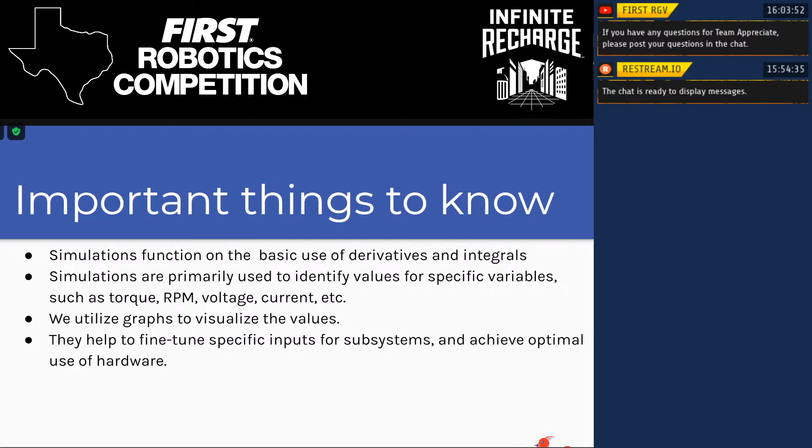Simulations themselves are primarily used to find variables that you're looking for. So torque, RPM, voltage, current, these are all things that simulations would be helpful finding, because they're things that would affect subsystems. Graphs are what we use to output these simulations and get what their outputs are, because otherwise we wouldn't be able to see what they're actually giving us, and they'd be essentially useless. And these graphs help us to fine-tune our specific inputs so we can hone in on the correct set of variables so we can get the outputs that we want.

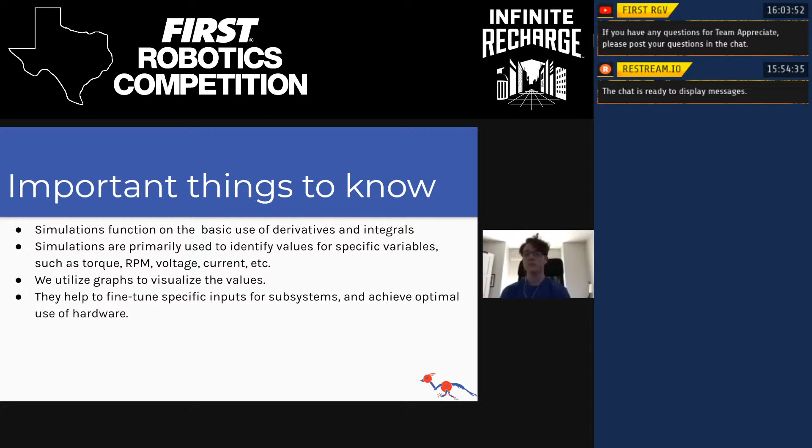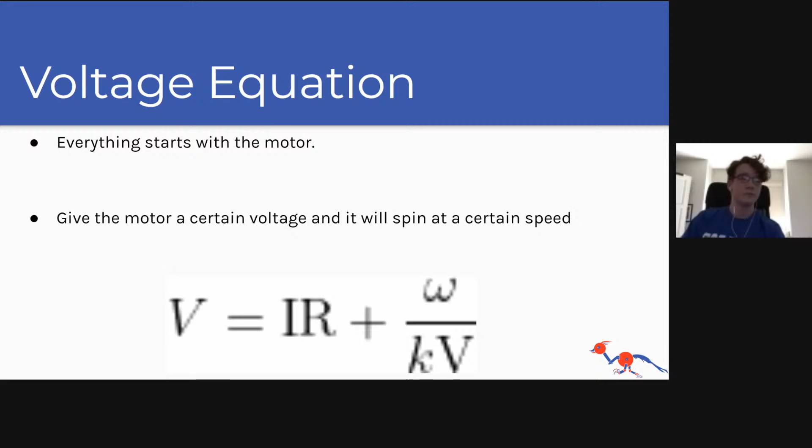So in terms of applying this to a robot, obviously robots can be broken up into different subsystems, and depending on what robot you're building and what game you're building for, subsystems will be different. For Infinite Recharge, we had a shooter, intake, drive base, and a hang. And we decided that the shooter would probably be the easiest thing to build a simulation for. But if you're going to build a simulation for a different subsystem, you're going to want to figure out the control mode for each motor in the subsystem.

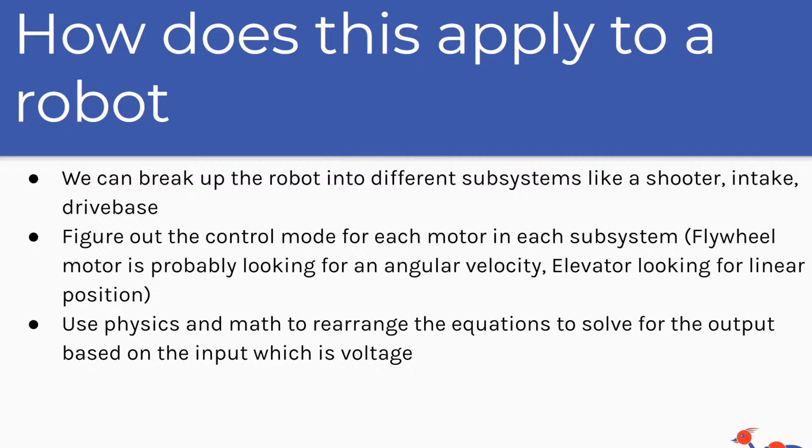So the flywheel motor for the shooter is looking for an angular velocity, as we want to know how fast it's rotating. And then an elevator per se would be looking for a linear position because we want to know how quickly it's rising and falling. And it's important to have an understanding of physics and math so you can easily change between these two types of control modes, and you can understand what type of equations would go to which type.

So going more into the derivation side of things, like I mentioned before, that voltage equation is going to be the initial starting point. It's where we get all the equations that we use in simulations. And you can't just use the voltage equation itself. You actually have to derive it and get different equations with different variables in order to find a more apt and succinct way to find the variables you're looking for.

So it can be a little bit difficult to find the derivation that you're looking for. So what we end up doing is finding the equation that we want, maybe online or something, and then plugging variables in to get it more exactly to what we want.

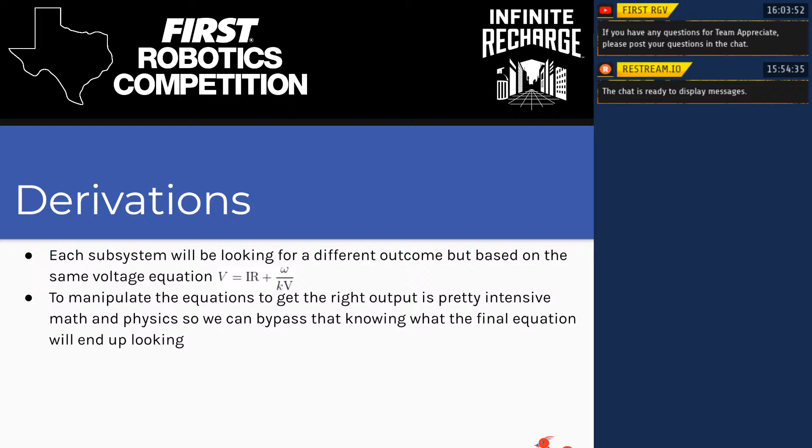Getting into the implementation in LabVIEW, we have our take on the subsystem and how it's implemented in a simulation. So we decided, like I said before, to take a relatively easy subsystem, like a shooter with a flywheel. And this is because it's a simple subsystem, because it only has two motors, both are spinning a flywheel, and it's a very simple way to calculate angular velocity, torque, current. It's definitely not too difficult in that regard.

And simulations are important. I actually wanted to just point this out because our flywheel during season last year, we actually couldn't quite hone in on the values that we wanted for it. We ended up manufacturing 3 separate flywheels, each with different radiuses and weight and widths, just because we didn't know what we needed. And so at the end of season, we decided to try to implement the simulation because we realized that it'd be much more effective and easier to use rather than just manufacturing more and more things and wasting more and more parts and time.

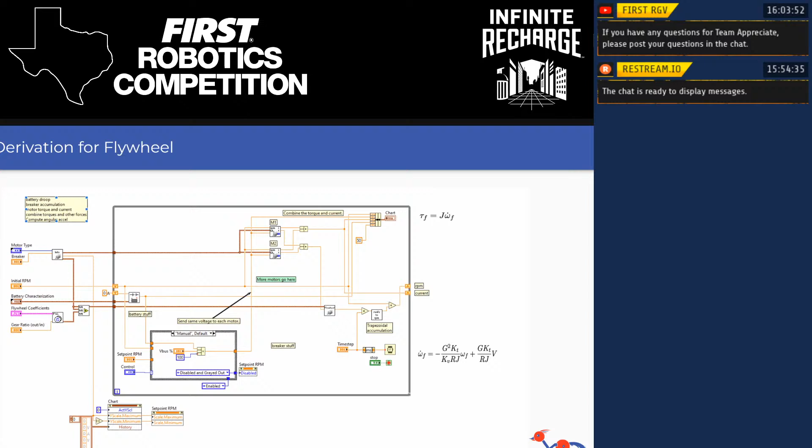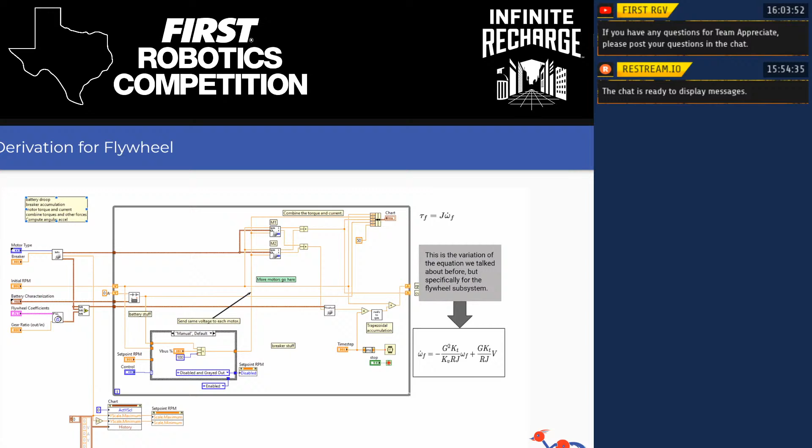So getting into the actual equation that we're going to be using for this flywheel, we have in the bottom right there, click, there's that equation. And that's the derivation of the initial voltage formula that we were talking about before. And so there we're looking for final angular acceleration using a bunch of different constants and variables like gear ratio and moment of inertia. It's not entirely important to understand exactly what that equation is and how it works. It's just important to know that that's the equation we're using.

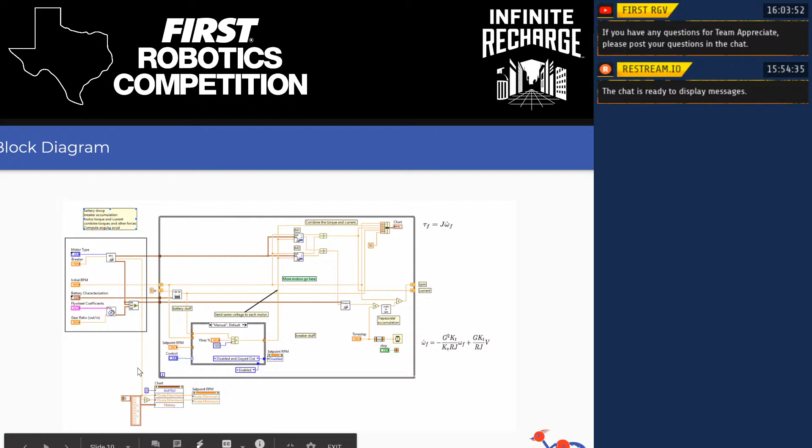So on the far left there, you'll actually see a group of inputs. And these inputs are basically everything that you're going to need for the subsystem. The user inputs them, obviously, and it contains things like motor type, breaker amperage, the initial RPM of the motor, battery characterization, flywheel coefficients, gear ratio, etc. And then those values are going to be plugged in to a lot of different areas in the simulation, which causes them to be very important. And knowing how to use them is also an incredibly important thing to do.

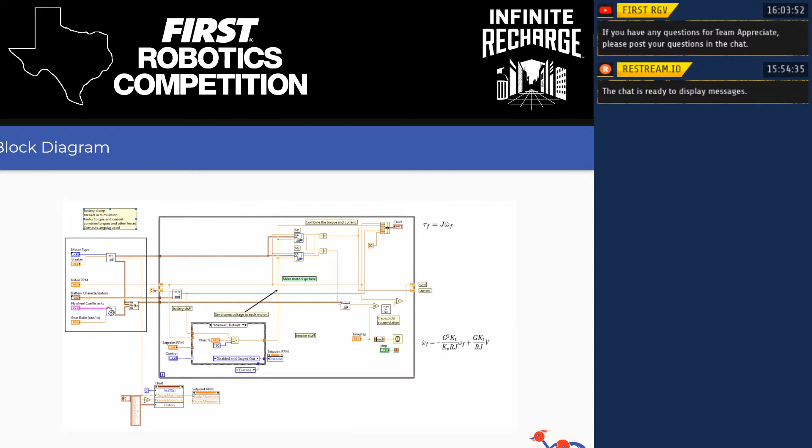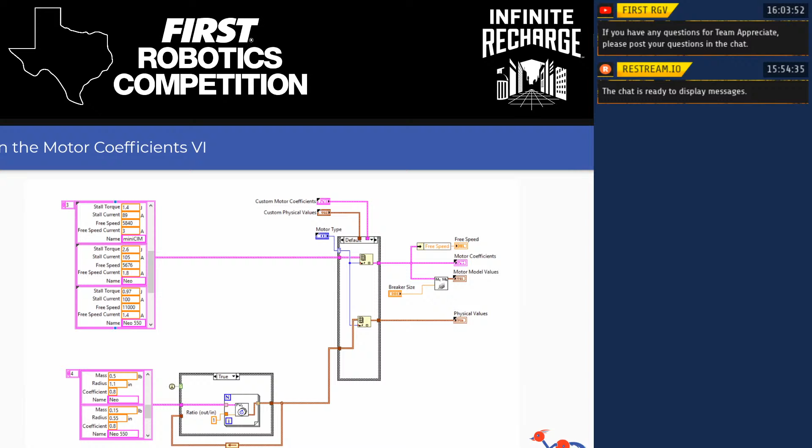So if we head into one of the input VIs, we'll see that you have a cluster, or 2 clusters, on the far left. And both of those serve to give you information regarding the motor. Now, the motor you can change as one of the inputs, and you plug it in to this sub VI, and that gives you the different motor values.

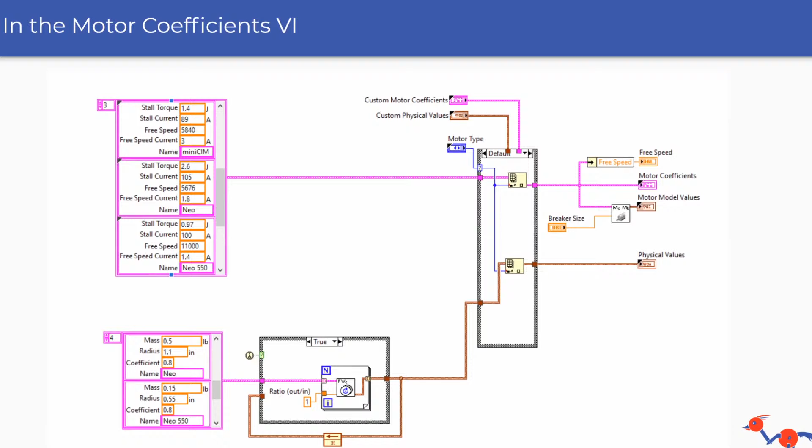So you get things like stall torque, stall current, free speed current, and you get the mass, radius, and coefficient of the motor. And these things are very helpful for finding things like the physical values of the motor, the free speed, the motor coefficients, and the motor model values, which we'll see as output on the far right. I think you'll have to click a bunch here because there's a couple of animations that we skipped.

So if you click again, you'll see that we're looking at the M1 and M2 blocks. And these VIs are helpful to combine torque and current, because as the values that are being inputted aren't graphable, we need to change them into something that is graphable. And so that's what those VIs are doing. And if we actually head into those, we'll see some of the math that's involved in that.

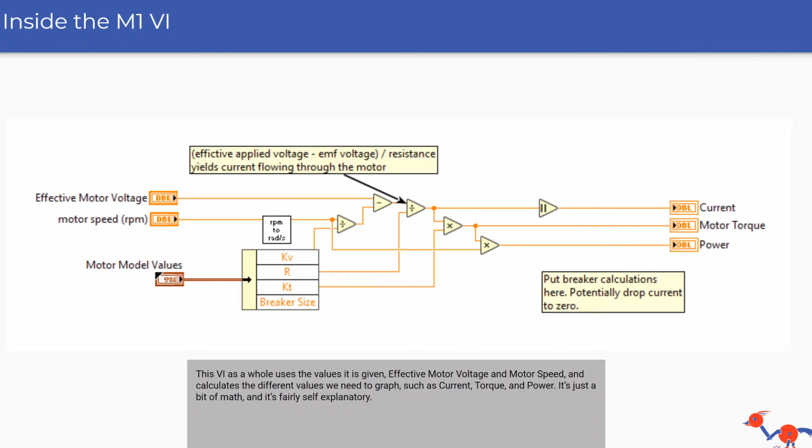So it's not actually too much complicated math. It's mostly just some basic division, subtraction, multiplication, etc. And you use that to find the current, motor torque, and power of the motor. So you're able to send that to a graph and see how it changes in regards to the different inputs you're going to give it.

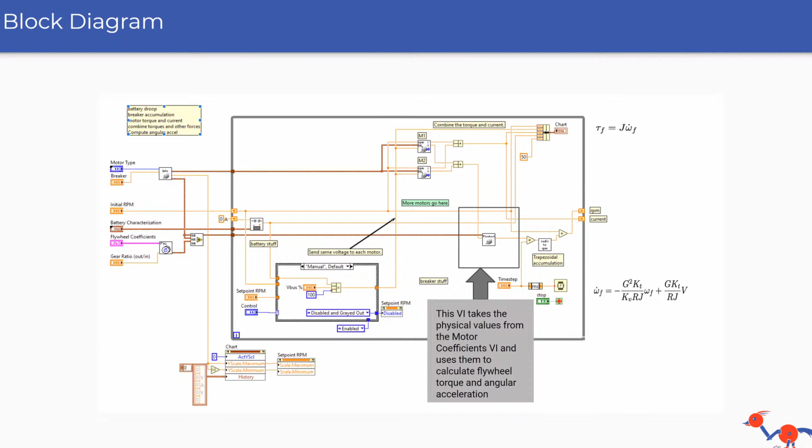So if we look towards more of the center, we'll actually see a VI that's called the torque and acceleration VI. And this VI is used to calculate the angular acceleration and the flywheel torque given the motor values that we set as input. And so if we head into that VI too,

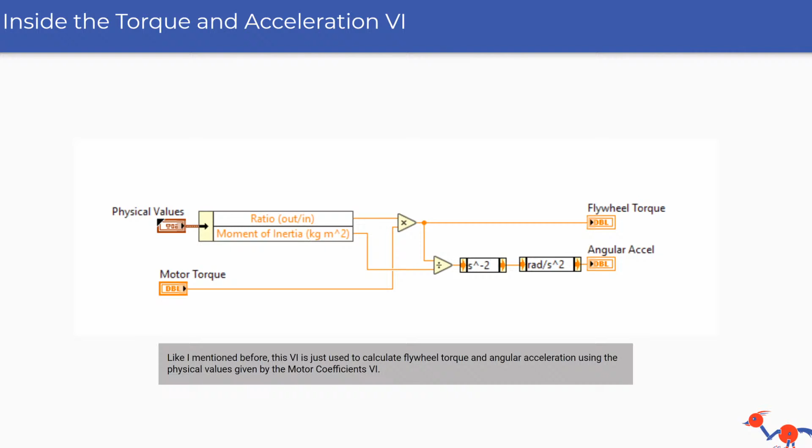we'll actually see just a lot of simple math again. We take the gear ratio and we multiply it by the motor torque and then divide that by J, the moment of inertia, and we end up with angular acceleration and the flywheel torque, which are two very important values that we need a lot in the equation that I showed you guys before.

So as a whole overview, you'll see there's a lot of VIs that I didn't really explain in much depth. Many of them are self-explanatory or not very useful in terms of actually implementing a simulation. Some of them are just testing or fail safes. So a lot of the things I did want to go over are the more important and definitely the more valuable topics to understand and learn about when talking about simulations.

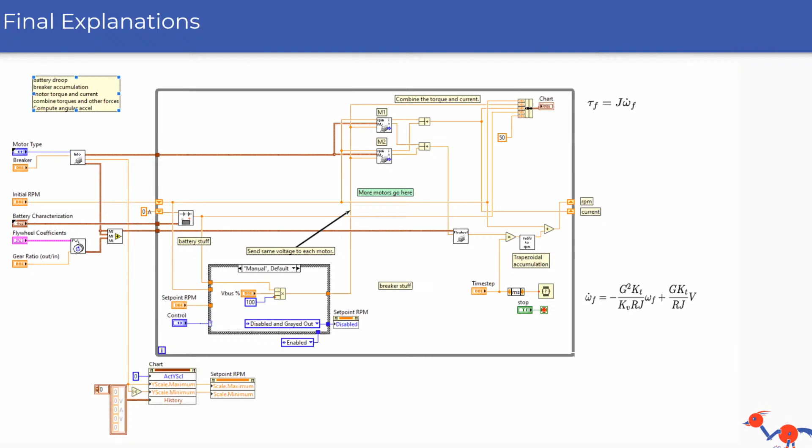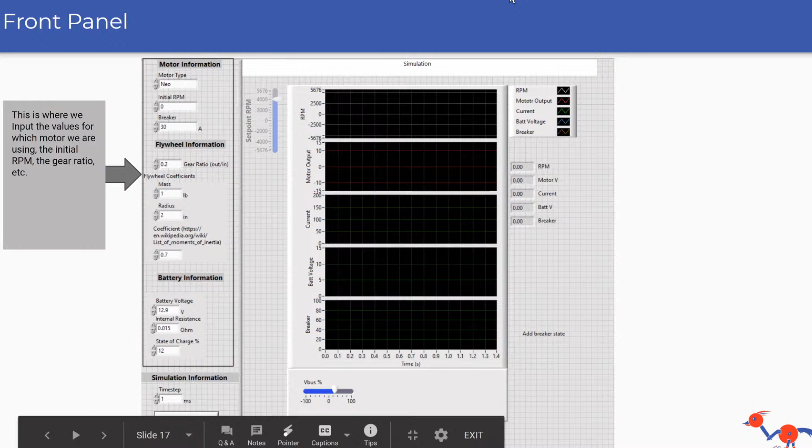So if we look at the far left, we'll see a bunch of the different inputs. And these inputs obviously correspond to the inputs that are shown in the block diagram in the coding part. And these inputs are very important because they change a lot of the different values we're going to get based on the gear ratio, the moment of inertia, the initial RPM, the breaker amperage, all that stuff. It's very important because it's going to change a lot of the values we get, and it's going to affect how we read our data.

And in the middle, we'll see the graphs that I was talking about earlier. And these graphs are obviously important because they serve as the output and basically the only method we have of understanding the numbers we input and how they affect the numbers we get out. And at the bottom, there's a little slider. It's the VBus slider. And if you don't know what percent VBus is, it's essentially just the power percentage that the motor is given. So 100 is fully forward, negative 100 fully backwards.

And sliding that up and down while the motor is moving actually shows you how much of a current load that gives the motor and how much of a current load that it takes on the battery. And that can cause a lot of brownouts or issues, and understanding that and being able to check for that is a very important thing. And that's also quite helpful for simulations.

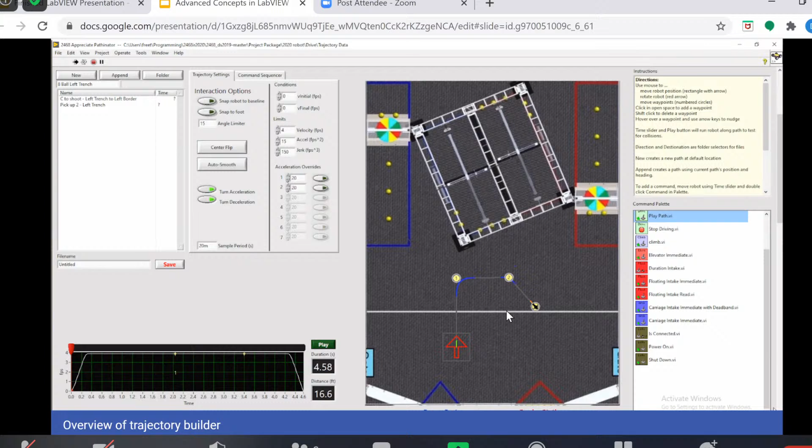First, I'll mention what a path planner does. So it basically gets a bot from point A to point B with any number of intermediate points. And ideally, you want to have an optimal path. Now, what this means is it's two main factors: the speed, how long your bot takes to travel the path, and then when it comes to wheeled robots, there's smoothness. It's important because you don't want to damage mechanisms by being too jerky or tipping the bot.

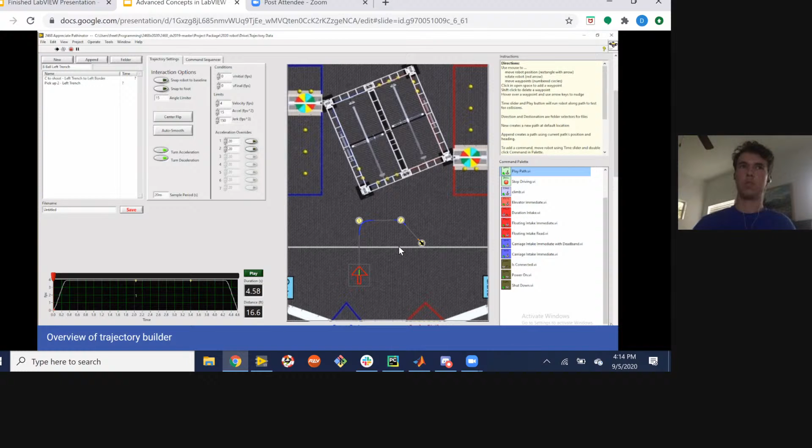And this slide right here is the main UI of our path planner. So in this whole gray area, the field image, you can select points and that'll make the path. This field is just taken from the game manual. We just put the image in here, and we have a configuration file that maps the pixels to real world values.

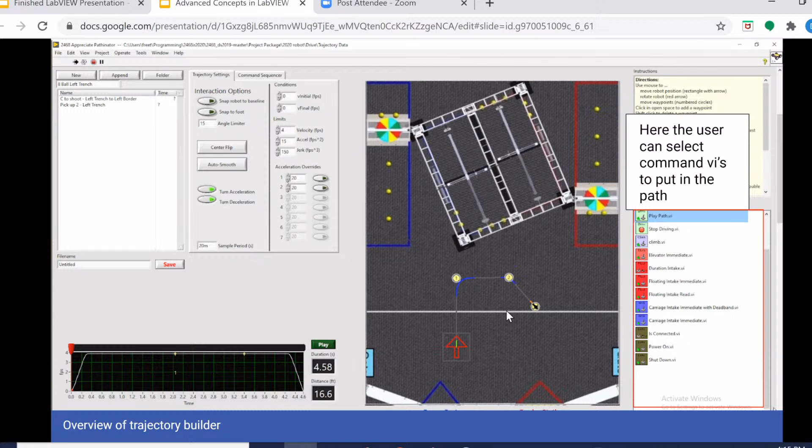On the right, we have this palette for commands because our paths have commands stored within them. And then when we run the path, the commands will automatically get called. So you don't have to run a part of a path, stop, call a command and then run another path. So it just makes the code a lot cleaner.

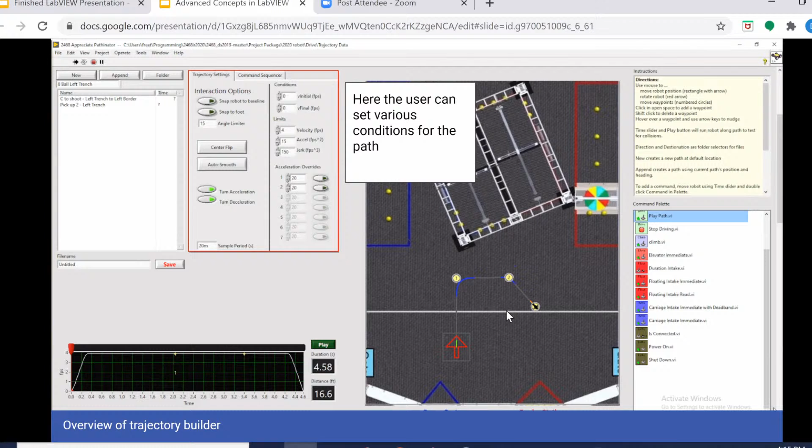Here, the user can set various conditions for the path, such as initial velocity, final velocity, and then limits on velocity, acceleration, and jerk, and then other things like acceleration override. And to the left of that is just the list of all the path files.

Down at the bottom, we have a velocity curve along with the duration of the path and the distance it travels. And if you hit the green play button, it'll show the red arrow on the field move along the velocity curve.

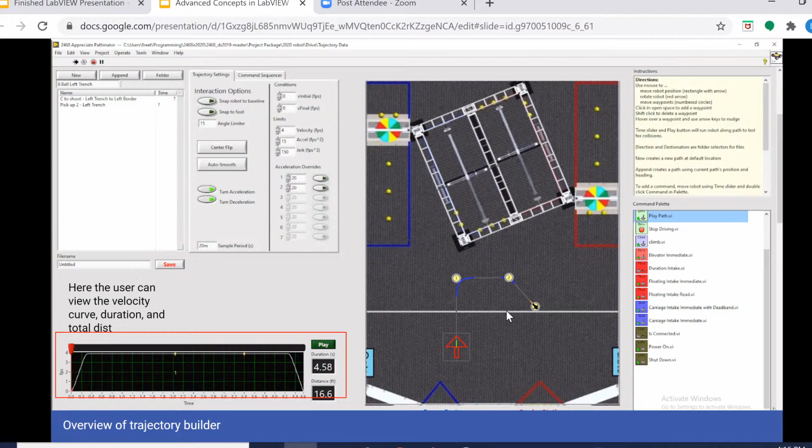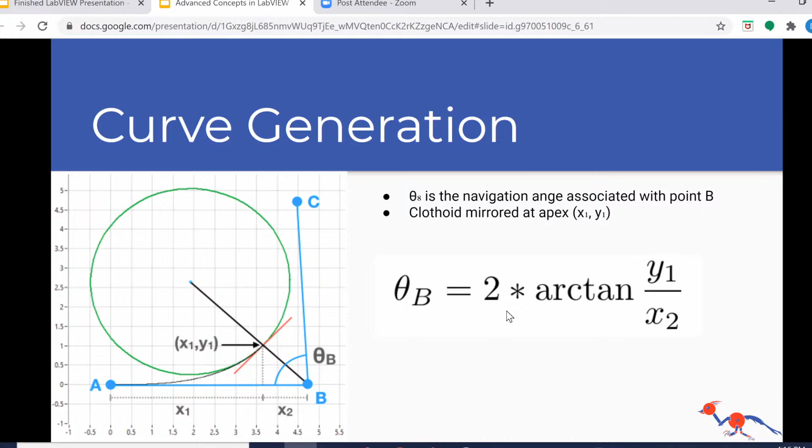And so what we do is we generate a clothoid from point A, and it goes up until the point X1, Y1, and then we cut it off and mirror it. So it's the same curve going in and out. And theta B is defined as the following in the slide.

So while developing the path planner, we thought it'd be useful to make a plotter for Euler spirals. So this is it. As you can see in the top right, there's a little key for the various visuals. So on the sliders on the top left, T kind of represents the length of the Euler spiral. If you increase it, the curve would go longer.

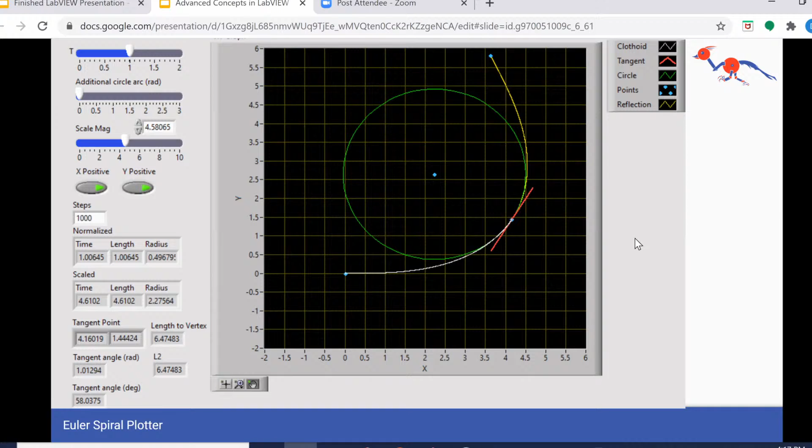So now I'll talk about the velocity of our path. So to make our path smoother, we try to run at a constant velocity, except for when we're accelerating and decelerating at the beginning and the end of paths respectively. As you can see here on the left is one path at 4 feet per second, and it gets pretty close to the intermediate point. And on the right, we have the same path but at 6 feet per second. And to maintain constant velocity, we can't get as close to the point as the 4 foot per second one.

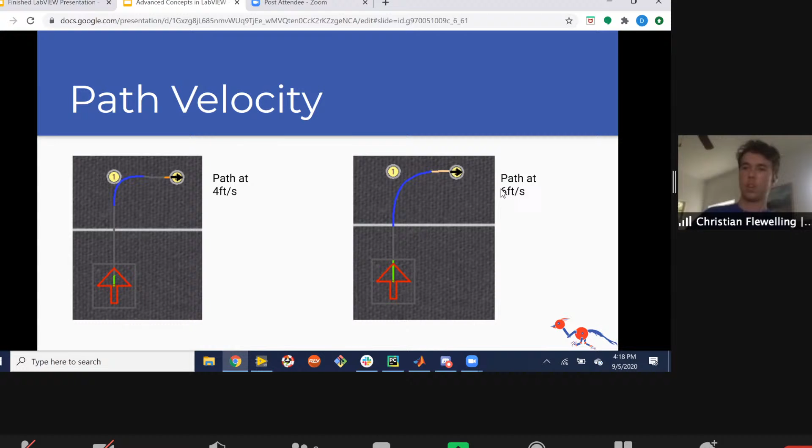Additionally, our path planner has visual marks on the path to show various things. So the green line on the beginning of the path is acceleration. The gray just means we're driving straight at a constant velocity. Blue means we're turning at a constant velocity, and then orange is decelerating.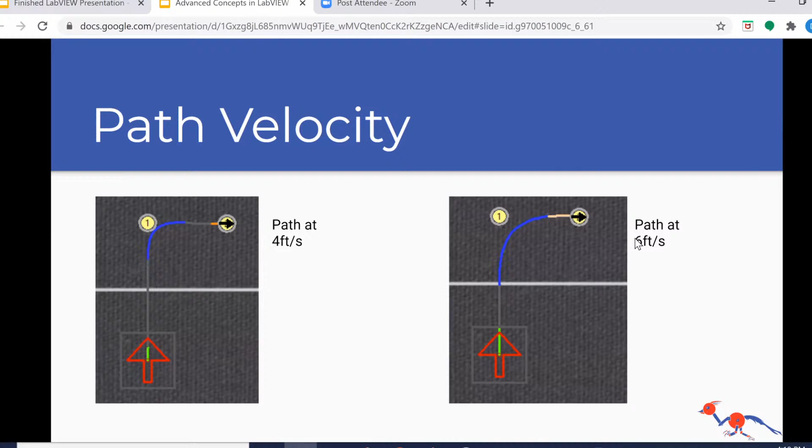Can you go back, Drew? It's not very optimal for speed to use a constant velocity because we have to end up driving more distance anyways. But with a 15-second auto, we've never had issues with time.

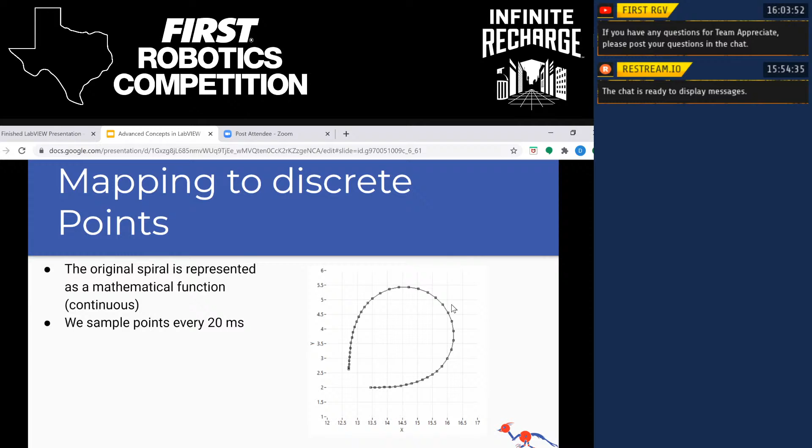Since our curves are represented as mathematical functions and are continuous, it's not very friendly to store on a file or in memory when you're running the path. So we need to make it a more memory-friendly format. So what we do is we sample where the bot will be every 20 milliseconds. This is configurable, but we usually just run with 20 milliseconds. As you can see on the graph on the right, as the bot's moving slower, the points are closer together, and as the bot increases in speed, the points get farther apart.

Now I'll talk about how we drive the actual path. So for a small period of t, the bot will move f units forward. To account for driving in a curve, it needs to move f minus d ticks per millisecond on the left, or f plus d on the right. And d is defined as w times tan theta.

Theta is the navigation angle. As you can see on the second diagram, it's actually just the same triangle, but rotated 90 degrees. And so d represents basically how much farther one side will travel than the other. And one thing I forgot to mention is we then divide d by time to get the motor speed we need to set.

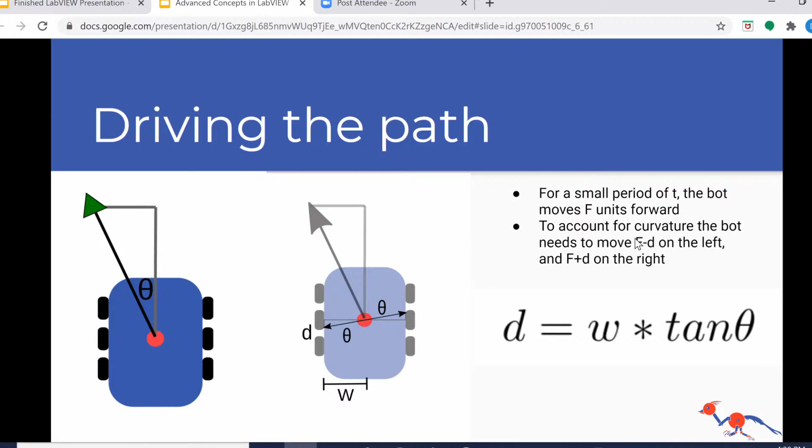All right, so this file is called calculate velocity set points. It's located in the play path section, which is the command we use in the case structure of the drive controller. What this does is it takes in the subsystem data and it outputs a left and right set point, along with some other things.

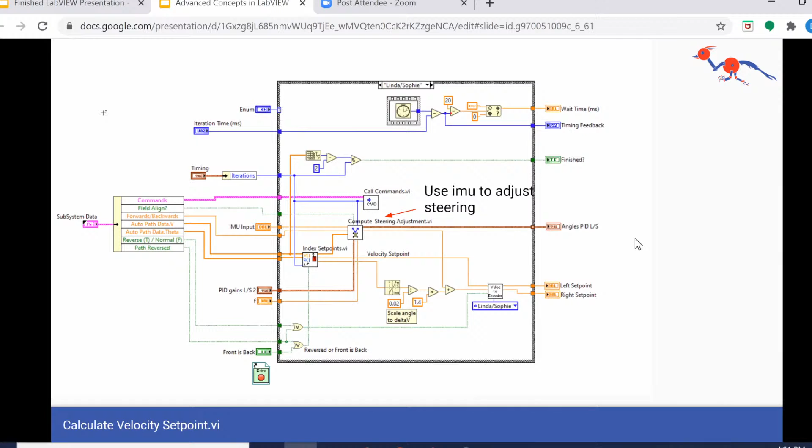So first we index the current velocity and angle based off the iteration of the loop we're in. We also take into account whether the path is reversed or not. So if it's reversed, we just index from the opposite side of the array or arrays. This file just uses the IMU with PID to adjust steering if we overshoot or undershoot. And right above it is a file called commands, which will call the current command if there is one.

All right, so this code I zoomed in is basically the math in the last slide. So it takes in a theta and then scales it to time and then turns it into a dv. Now the 1.4 is like a fudge factor, or really just treat it as an F term that we have to tune every year. Does it have a mathematical derivation? Maybe. We never took time to figure out what it really means. We just kind of tune this every year, and it works pretty well.

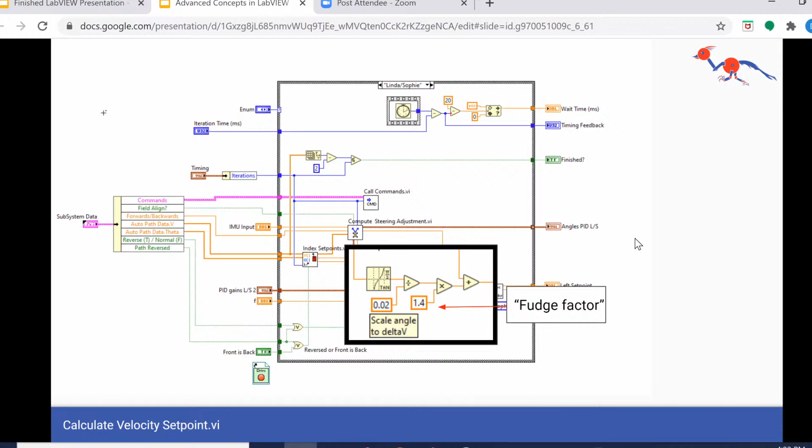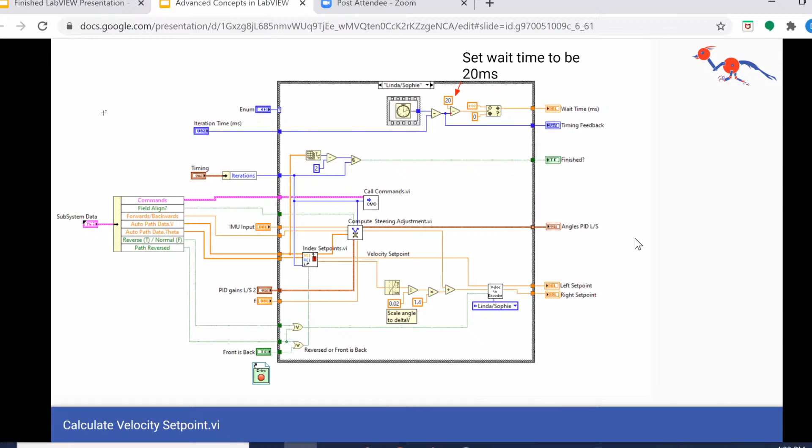Up at the top, we have code to adjust for how off from 20 milliseconds you are, because the points in the path are supposed to be every n milliseconds, or 20 milliseconds, apart. So if our loop runs at, say, even 18 milliseconds or 22, that's a 10% difference, which will mess up a lot of things in the path. And at the bottom, there's a file that just takes the dv and turns it into encoder ticks per millisecond.

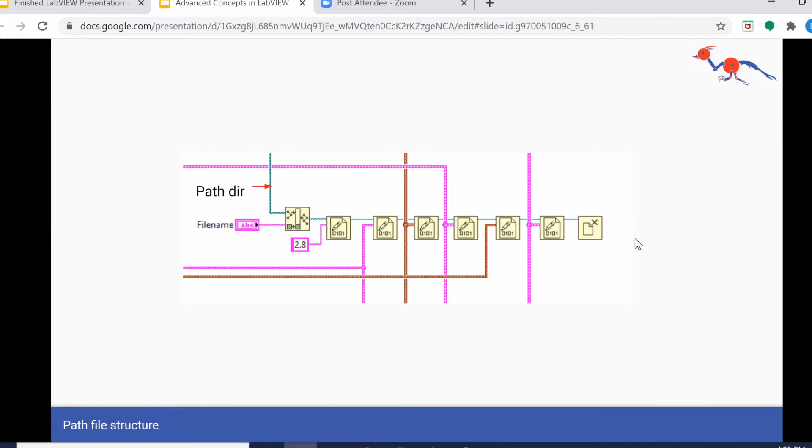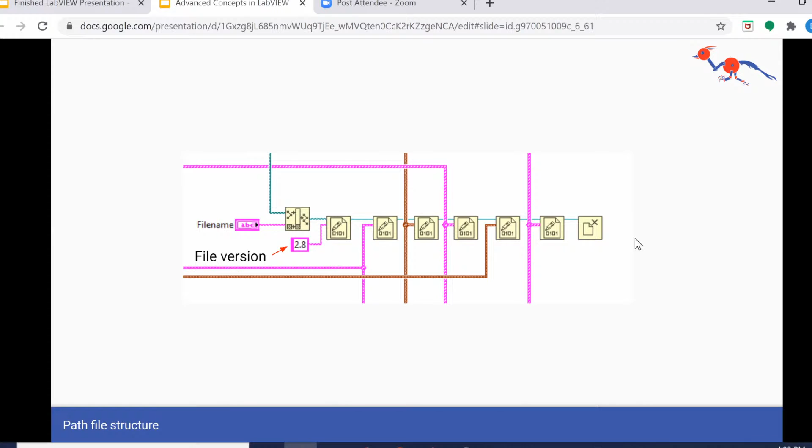Now let's talk more about our LabVIEW specifics for the implementation. So this is the code that writes our path to a file. It first takes in the path or the directory where we'll store this file. And then it takes in a file version, because we've had multiple versions of this path file throughout the years, so it's useful for when we reread from the file. Then we have path conditions. These are the conditions the user set in the UI, such as velocity, acceleration, jerk limits, and initial and final velocity.

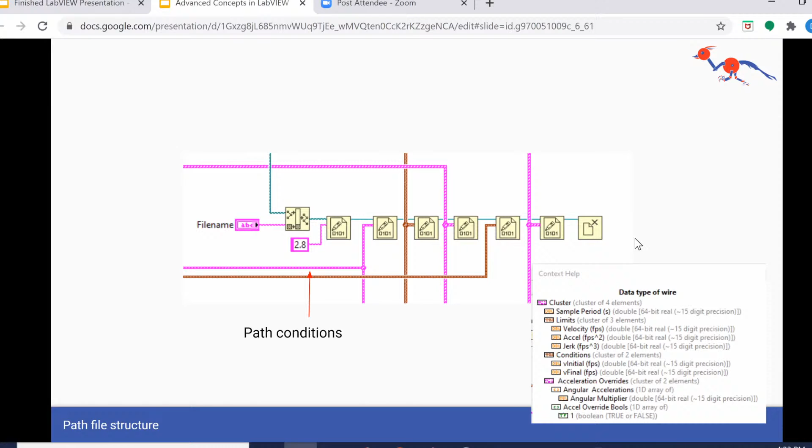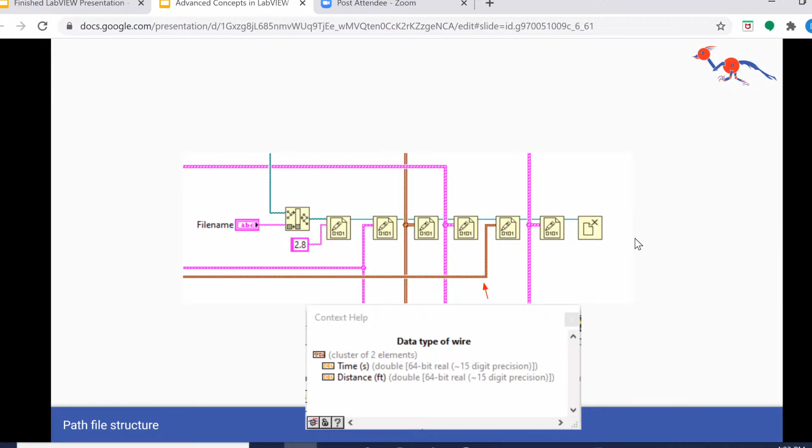Next, these are user-defined points, which is just x, y, and navigation angle, which is theta. And then this is the main path data, which we use to drive the bot. It has the sampled points, so the x, y, and theta, and it has velocity for all of it. Additionally, it has an acceleration index and a deceleration index, which is basically the index of the point where the bot stops accelerating and starts decelerating respectively. Next, we just have the time and distance the path travels. And lastly, this is all the data we need to call the commands for the path.

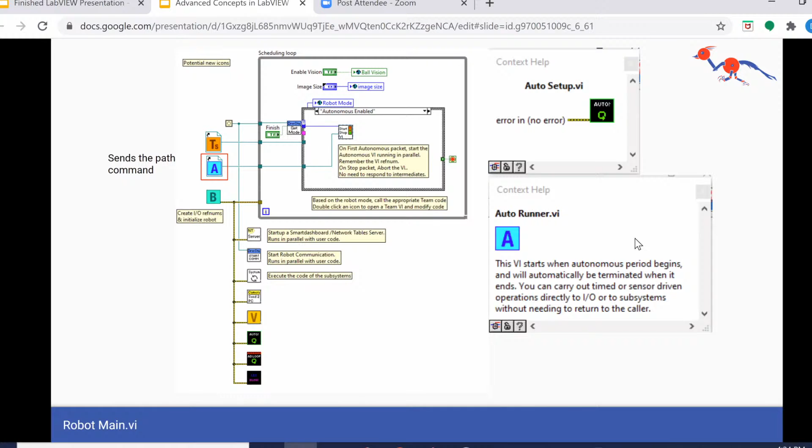So this is the autonomous setup we use. This is robot main VI. We have two important files in here that we use for auto. The first is auto setup. This handles network tables and the selection of our autonomous. Next is auto runner, which basically just sends the play path command.

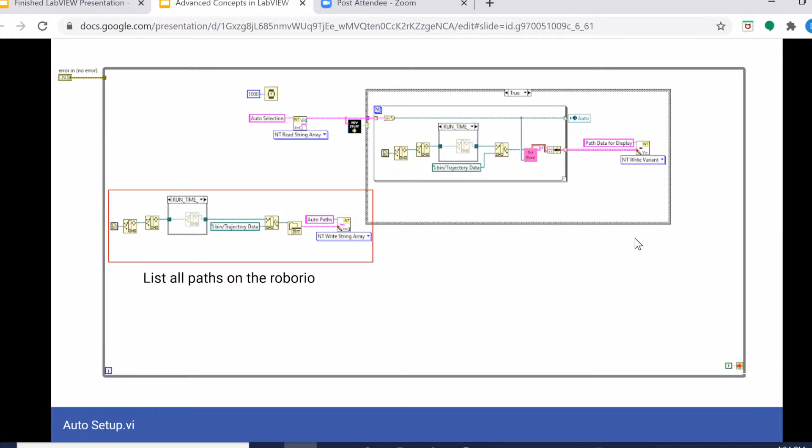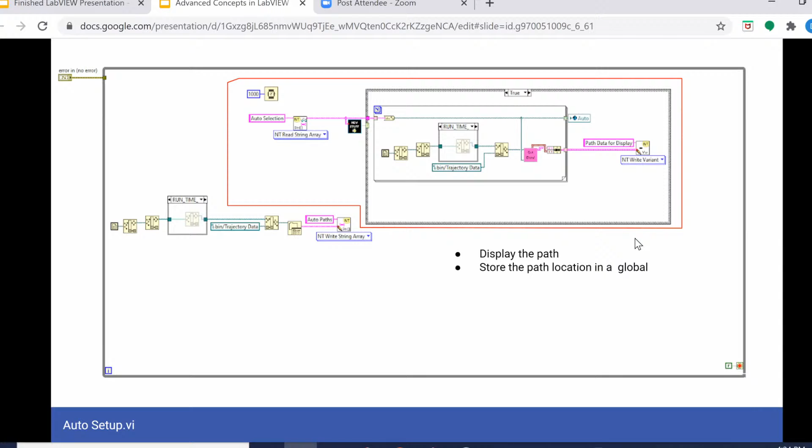So this is auto setup. In the red box, this just takes all the paths on the RoboRIO and lists them on our custom dashboard. Then this takes in the selection and sends that path to a global, the auto global, and then we also display that path on the dashboard. This is the auto runner VI, which simply takes in the auto global and plays it.

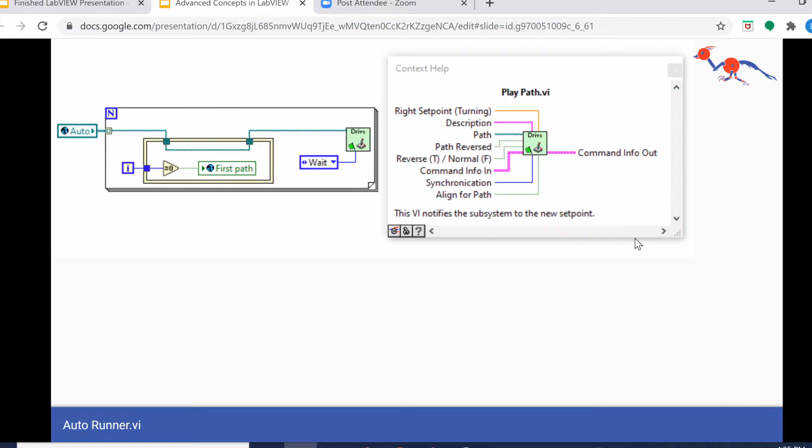This is the play path command. What it does is it takes in the path and then it uses get data, which simply reads from the file. So yeah, it just chains read operations to get out the data we need. And then we have to operate on it to make it fit with the command data.

So now I'll talk about the shortcomings of our path planner. It's really difficult to use multiple velocities. The whole idea is centered on having a constant velocity, so if we ever needed to not use that, it'd be a really difficult process. Also, it relies on precise timing, right? Having 20 millisecond intervals, or else the path will get messed up.

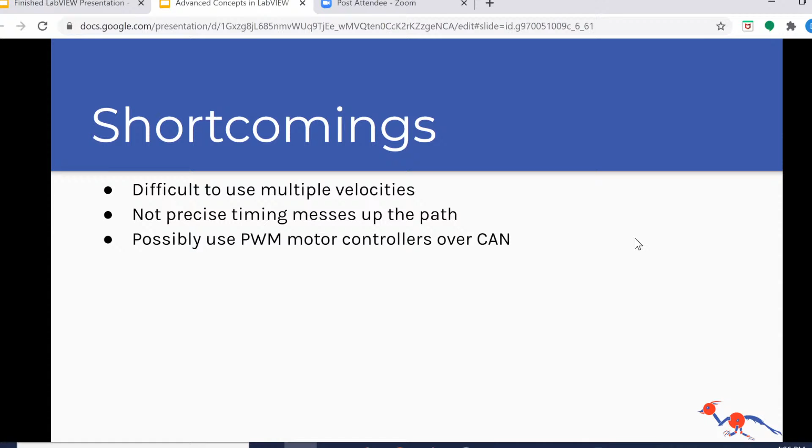And the last one was more of a consideration: we could use PWM motor controllers over CAN. The main advantage would be it'd be cheaper. So we handle encoder values and PID on the Rio. Now the main problem is we lose all of the Spark Max libraries. So that's why it's more of a consideration than a shortcoming. But the idea was it could save money.

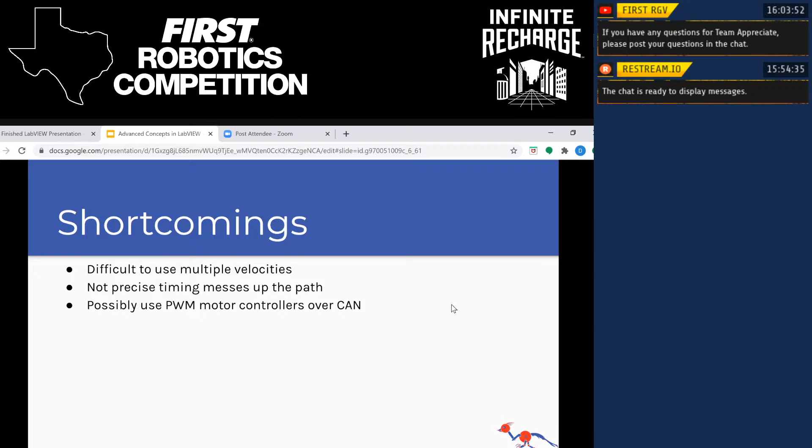Hi, my name is Unnati Perry. My name is Abhinav Perry, and we're going to talk to you about homography.

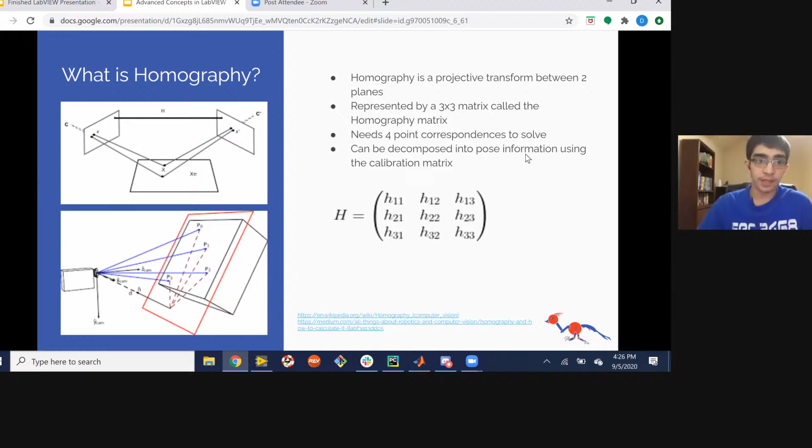So homography is the relationship between two planes. The idea is that we have points on each plane, and some of these points are actually corresponding, so they represent the same information. So the idea is to use homography to relate these points between the planes. Each point will have an XY coordinate, and we will take these coordinates and represent them using homogeneous format. You don't need to know about that. It's just another way of representing a two-dimensional coordinate. And then we're going to multiply it by this homography matrix, which is a 3x3 matrix, and that will give us the corresponding points on the other plane.

Now, this homography matrix can actually be solved if you know 4 of the point correspondences on the different planes. And if you can solve that, you can use the homography matrix in many different applications. The homography matrix can be decomposed into pose information if you know the intrinsics of the camera. So that means you can get information about the orientation of the camera or even the translation of the camera, and you can use this for various applications.

So the homography is derived from the pinhole camera model. Basically, it's a mathematical representation of a camera. The idea is that it has certain parts, such as a focal point or a focal length, and all of these things combine so that you can project 3D points onto the image plane.

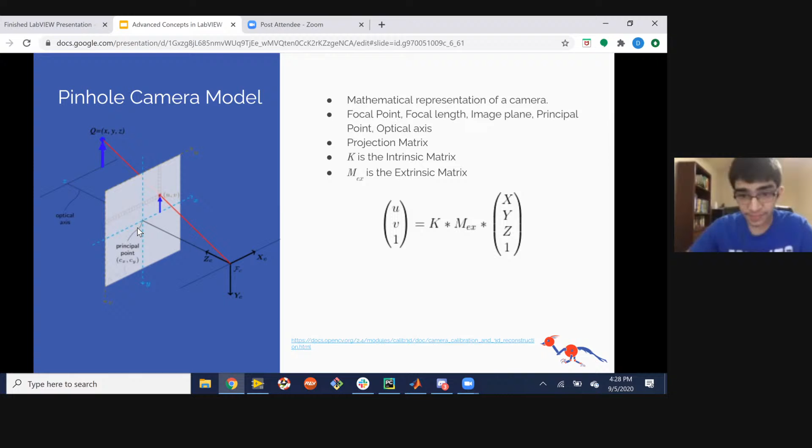So some key things that you need to know. The focal point is the point that's bolded in the 3D axes. Then the focal length is the distance between the focal point and the image plane, which is that gray rectangle. The image plane is where 3D points get projected onto, so when you're taking an image, the image plane is basically the image. Then you have your principal point, CX, CY, which is a coordinate that represents the center of the image plane.

Then you also have your optical axis, which is where your principal point and your focal point lie. So the idea of the pinhole camera model is that you have some 3D point Q, which gets projected onto the image plane at some UV, and that is the pixel location of that coordinate. If you do this for the entire environment, you can get the entire image, or what the camera is seeing. And this can all be mathematically represented by the equation to the right.

So it's basically saying that you have a 3D coordinate XYZ, you're multiplying it by 2 different matrices, which we'll talk about later, and then you get UV1, which is your actual pixel coordinate on your image plane.

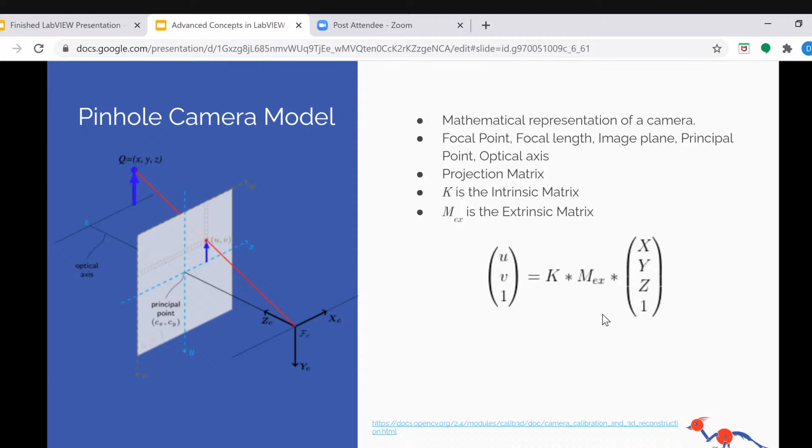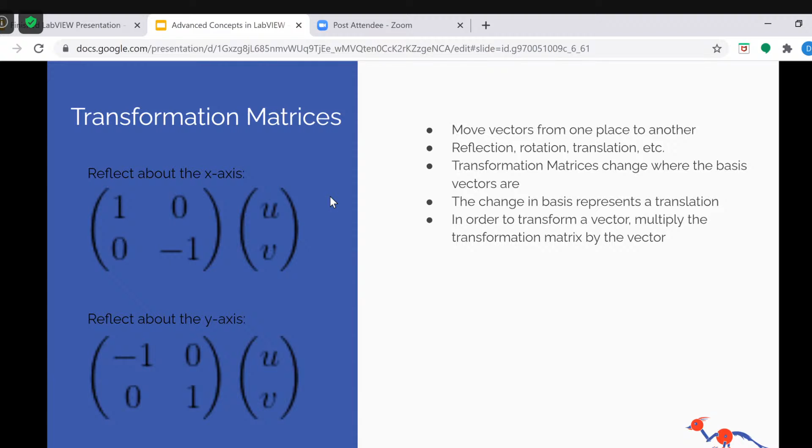So transformation matrices are functions that change vectors, and vectors are just 2 numbers in a list. Transformation matrices store the basis vectors that determine the transformation, and the matrices on the left reflect vectors on the x and y axis.

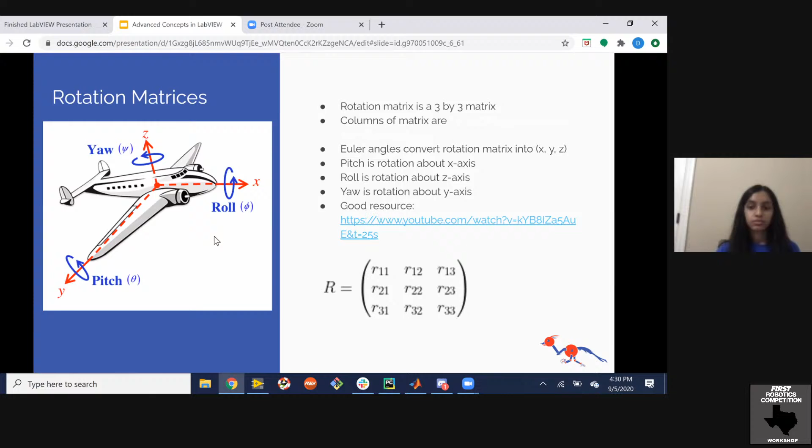So before, we were talking about the pinhole camera model, and there were two special matrices that we glossed over. These are actually camera matrices. A camera will have two different matrices that describe different aspects of the camera.

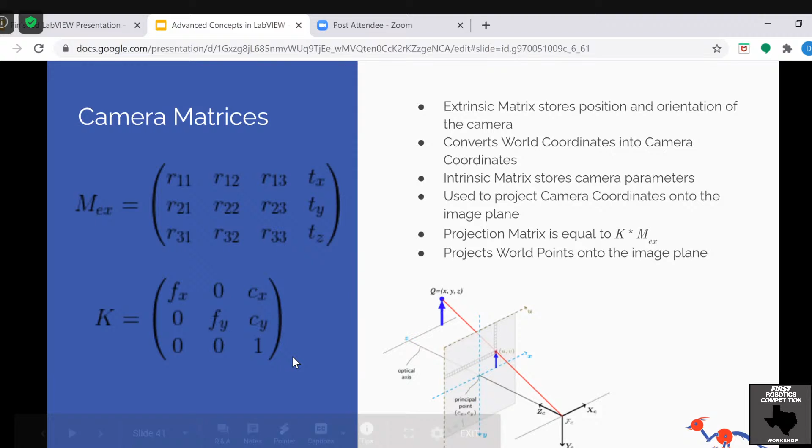So in this case, it's the intrinsic matrix and the extrinsic matrix. The intrinsic matrix is K, which is being highlighted over there. And what it represents is a lot of intrinsic information about the camera. So things like principal point, which is CX and CY, and then it represents the focal length of the camera.

Now, if you notice, there's two different focal lengths, FX and FY. And the reason for that is that it's measuring the focal length in terms of pixel units. The reason that it's different is that since pixels are not always square, they have a different width and height. So if you measure the focal length using pixels, you're going to get different measures of pixels if you use the width or the height. So that's why you have two different focal lengths.

And this intrinsic matrix, if you multiply it by a 3D coordinate in the camera space, then you're actually going to get the projection of that 3D coordinate onto the image plane. Now, the extrinsic matrix stores information such as the pose and location of the camera. And if you notice, there's actually a rotation matrix and a translation vector that are concatenated together. Those represent the rotation or orientation of the camera in space, as well as its position in space. So the rotation matrix will store the orientation, and the translation vector will store the position of the camera in space.

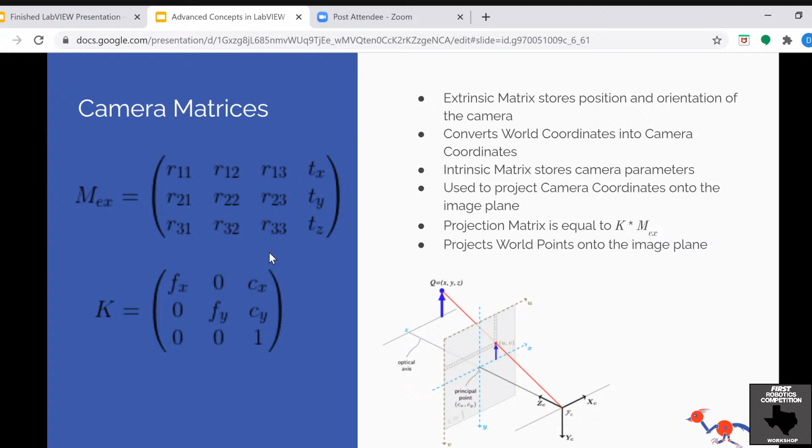And the reason that we multiplied this by the original 3D coordinate is because our original 3D coordinate is not given to us in camera coordinates. It's not given to us relative to the camera center or the focal point. It's actually given to us relative to another origin, which is somewhere in the 3D world. So by using the extrinsic matrix, we can convert the 3D points in the real world coordinates into camera coordinates. And then from there, we can use the intrinsic matrix to convert those camera coordinates onto the image plane. So that's the basis of the pinhole camera model.

So some applications of homography are how you can decompose the homography matrix into pose information. And if you know the location of your camera in 3D space, if it's attached to some rigid body such as a robot, you will actually know the location of the robot on the field. So if you can track something like a vision target and apply homography, you'll have a very good estimate of pose. And this can be used in a variety of situations, such as auto align, or you can shoot from anywhere if you know your location, right? That's something that's pertinent to this game. You can also improve path planners because they require knowledge of your location on the field. So that's another really good use for FRC.

As for the implementation, the rough idea is to use some vision target like the image shown. And the idea is to look at certain features and track them. So remember how we said that homography was a relationship between points on different planes? Well, now we're going to utilize this relationship. So basically, we have one plane, which is the image plane, and some of the features, you might think of them as corners, right? These corners will be on those image planes. So we'll know the pixel coordinates of those corners.

Then in real life, we actually know that this vision target lies on a solid surface, right? It's on another plane. So we can get some coordinates of the feature points or the corners in the real world. And that's another set of points. Now, if you can get 4 sets of points, then you can use the 4-point algorithm to figure out your homography matrix, which will tell you the transformation between your image plane and the real world. If you know that, you can decompose this homography matrix and get your pose estimate and use it for the uses that were mentioned before.

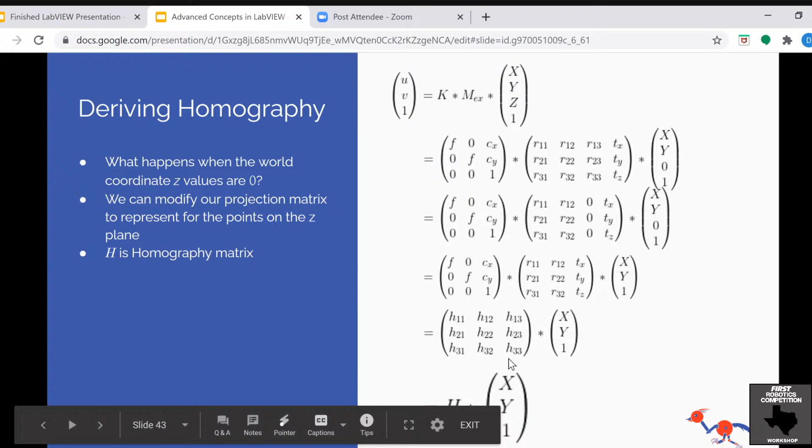So once we have this homography matrix, we can decompose it into a translation and a rotation of the camera. So the definition of the homography matrix is the first equation at the top. And all this stuff is the proof and the matrix multiplication. But the main point is that the pose matrix gives you your rotation and your translation.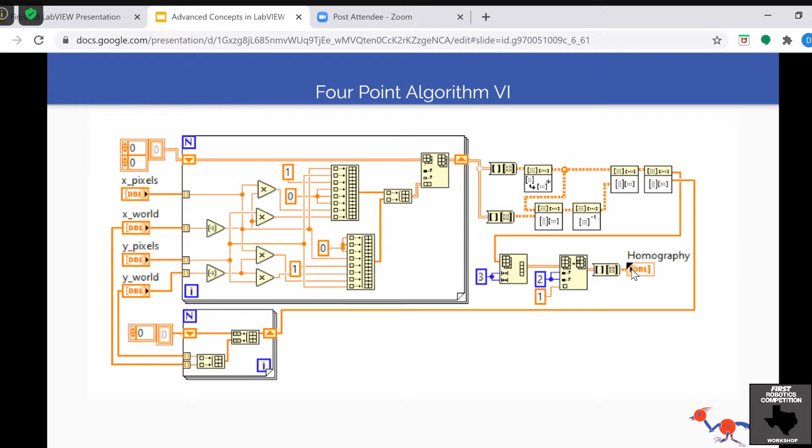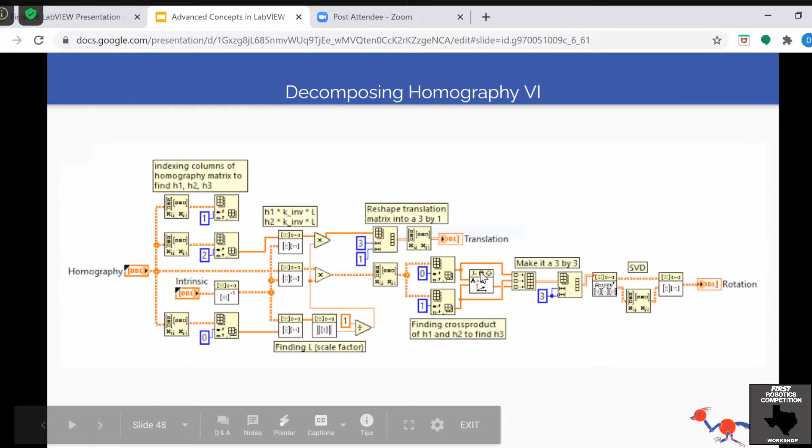So here we're constructing the coefficient matrix from the 4-point algorithm. Then we use the formula to get the homography matrix from the corresponding points. And here we're decomposing the rotation and the translation of the homography matrix using that formula that we discussed in the previous slide. And now we're using this formula to make the rotation matrix more readable and convert it into Euler angles.